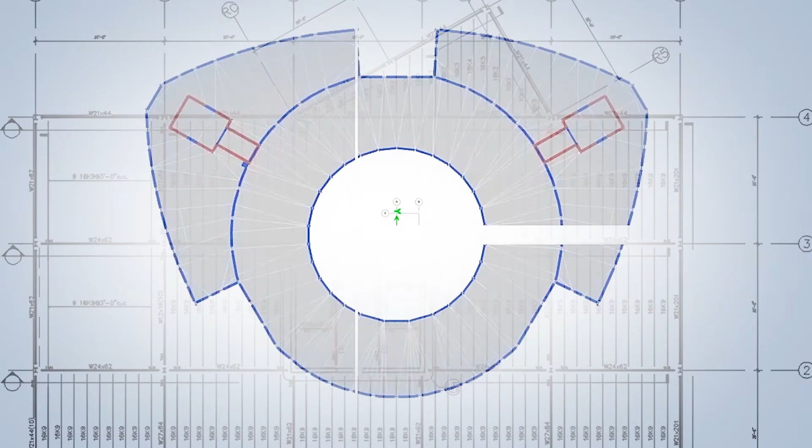I really love events like this because they highlight the incredible contributions of the structural engineering profession to humanity. Those that know me know that I have always believed that human beings are created for one fundamental reason, and that reason is to make the life of another human being better. And the beauty about the structural engineering profession is that we make life better for all of humanity on a daily basis. I mean, consider the stuff that we do. You don't have to look very far to see the incredible impact of our profession. Every metropolitan city is a testament to the grandeur of our work. And it's only because of structural engineers that our economic infrastructure even exists.

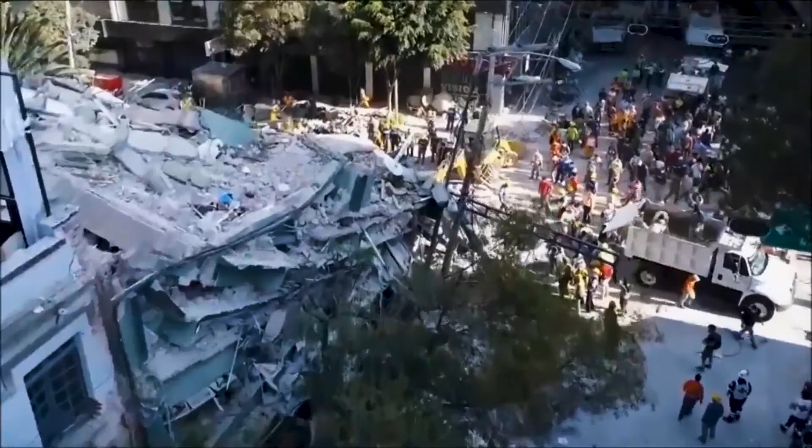On the other hand, our retrofit work preserves our past. It preserves our heritage. It preserves our history for all of the future generations to come. Every monument that's a testimony to the grandeur of humanity is standing only because at some point a structural engineer was involved. And above all, we are in the business of saving lives. We protect humanity from the ravages of natural hazards. Structural engineers are the reason why buildings don't fall down in earthquakes and buildings don't topple over in windstorms. They say that a person becomes a hero by just saving one life. I contend that structural engineers are saving lives every time the wind blows. That is the grandeur of our profession.

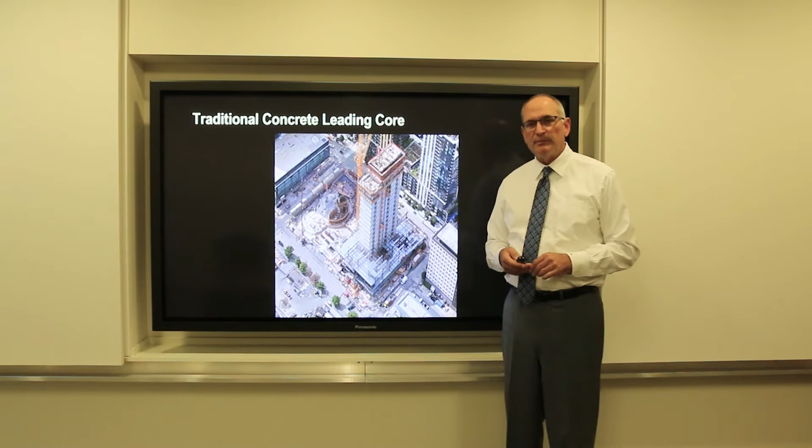The owner of the building asked us to see if we could come up with a better idea, an idea that would save time and save money, and still use the principles of performance-based seismic design. In the case of this building, Rainier Square, we did such a thing, and I'm going to share the details of that system with you now.

It's only through performance-based seismic design that we're able to achieve this design, because it falls outside of any of the code parameters that we would read in the prescriptive language of the code today. The building itself was on the cover of Engineering News Record magazine a few years back when we first designed it, because of the novel system that was used, not recognized by any building code.

There were many risks associated with that, of course. And performance-based seismic design allowed us to overcome those risks.

In Seattle, it's located in the heart of downtown on 3/4 of a city block. The project participants were notable Seattle architects and developers. And here are some of the statistics of the building. It's a very tall building, nearly 300 meters tall, with 7 basements, 1.4 million square feet of space in total.

A typical low-rise floor plate looks something like this, where the red color indicates the core wall of the building. Not dissimilar from what you'd see with a reinforced concrete building, but in this case, we used a composite system, one combining steel and concrete in a new and novel way.

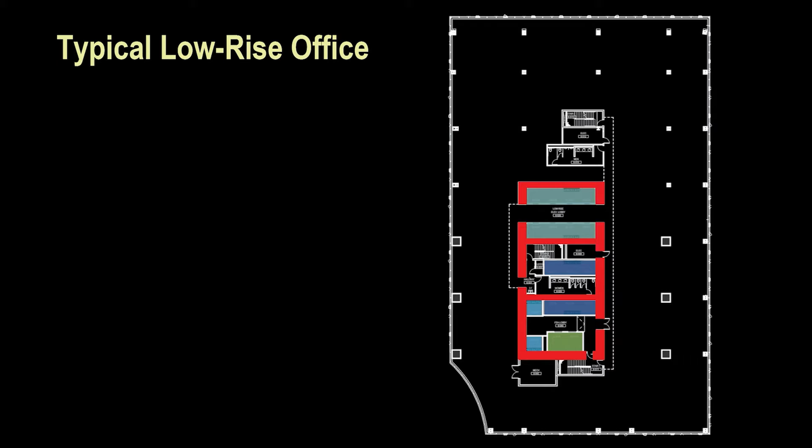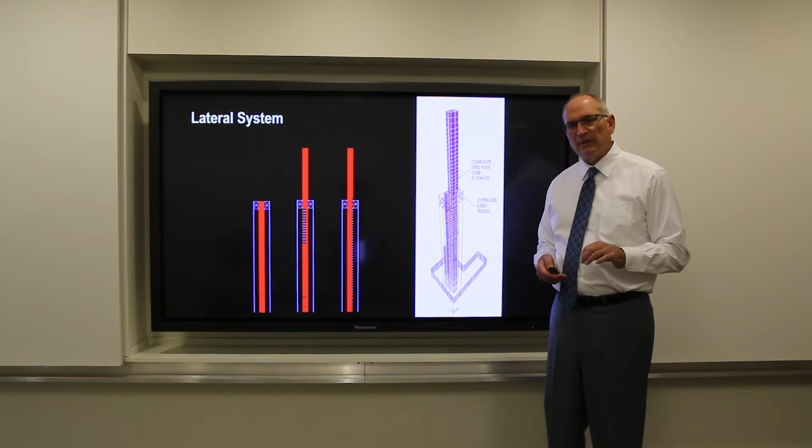In order to brace the building for wind and seismic loads, we needed to supplement the core with some additional bracing, in this case an outrigger system located at the mid-height mechanical floors, with outriggers and belt trusses reaching out to outrigger columns. Again, all of this is fairly indicative and similar to buildings that have been built the last 20 years. What's novel about this building is how we actually made the parts and pieces.

A close-up of that outrigger floor with the outrigger trusses and belt trusses shows that, in a traditional sense, we might connect steel trusses back to a reinforced concrete core. That connection becomes very challenging, very time-consuming, and very costly. So we tried to imagine a whole new system.

That whole new system was entitled a concrete-filled composite plate shear wall, or a panelized system, in which prefabricated steel panels could be made in a shop, trucked to the site, and then erected to form the building much like Lego blocks form a Lego tower.

Some of the dimensions of those panels ranged in thickness from 45 inches, which is about 1.4 meters, to 21 inches, which is just under half a meter.

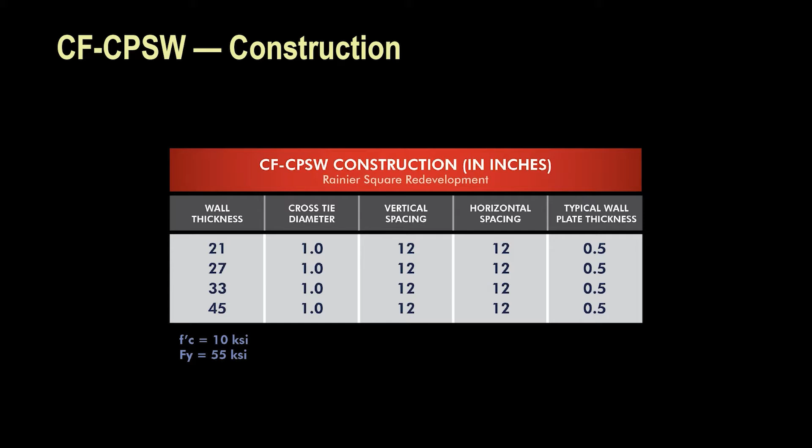The splice connections were also made in this fashion, where one plate stacked on top of another plate, and in this case were welded together in the field to form that field splice.

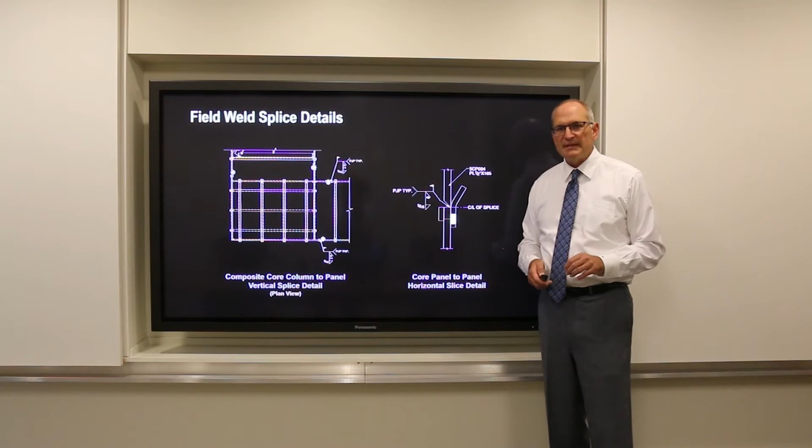None of this system has been described in the building code until just now, so as we were designing this building, we needed to use performance-based seismic design principles in order to justify the geometry and the design.

Individual panels look something like this, where the link beams that are commonly formed in the field were actually prefabricated as part of this H-shaped panel, and those panels then trucked to the site and stacked on top of each other to form the building.

In this case, we used 8 corner columns to form guides for those panels. The corner columns were 2 stories tall, where the individual wall panels were only 1 story tall. Again, all of these pieces were fit together in the field with the prefabricated units.

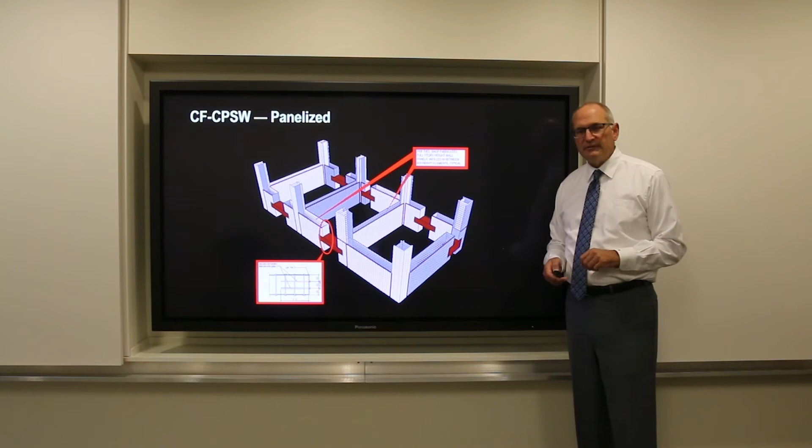Research behind all of this system was conducted starting in the mid-2000s at Purdue University, funded by the Charles Pankow Foundation and the Magnusson Klemencic Associates Foundation. Professors Bowman and Krager were the first to start researching this back around 2005, 2006.

Here you see a 5-story tall T-shaped wall section, which we built in the laboratory at half scale and then tested through the rigors of seismic loading protocol.

We looked at the panels also in an unconcreted position to understand their buckling capabilities and strength in the erected position prior to any concreting.

More recently, Professor Varma at Purdue has carried on with the research, looking at a variety of panel configurations wherein the cross-tie geometry and/or studs inside the wall panels help provide additional stability.

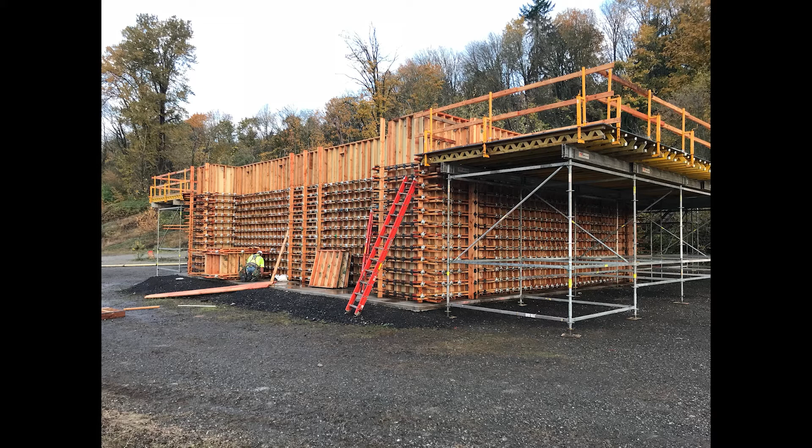We built full-scale mock-ups to ensure that this building would be able to be built correctly and efficiently once we got underway on site.

A full-scale concrete mock-up was first conducted to test the flowability and placeability of the concrete mix design. The mock-up was made of wood formwork and plastic cross ties so that we could take it apart after the concrete was placed, to see how the concrete flowed and was consolidated, ensuring our mix design would perform as intended.

We also built a steel mock-up to ensure that the pieces could be fit together, manipulated off the truck, lifted into place, and then secured.

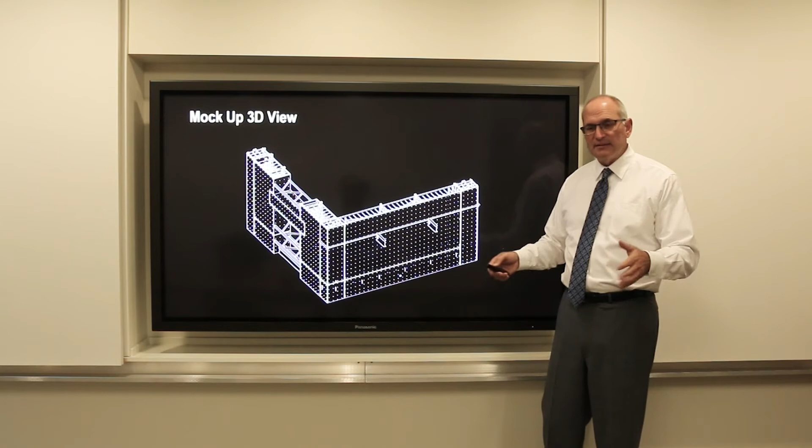The field welds were also made as part of the mock-up to understand the best welding procedures to be used to secure the two panels together.

Ultimately, shop drawings were prepared. Typical panels such as this, a planar panel, or more complex panels that included the link beams, as I mentioned, including, if you look closely, shear tabs to receive incoming beams, and the ledger angle to support the metal deck, were all fabricated in the shop.

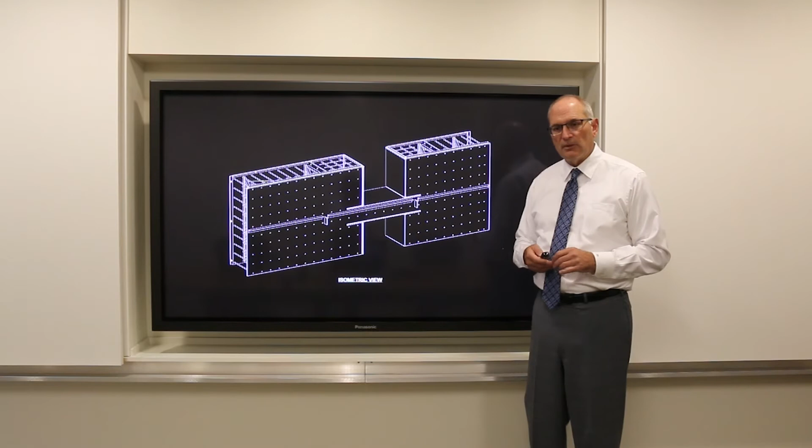Mechanical penetrations for ductwork and piping were also prefabricated in these panels to allow for a very efficient field erection process. Ultimately, the panels arrived on site and were trucked to a very close location and lifted down, in this case, into the excavation, where they were secured at the foundation level.

In this case, the initial ring of panels was erected on steel columns, which we entitled stanchions, that were embedded full thickness through the mat foundation, which was 12 feet thick, or about 3.5 meters thick.

Panels began to show up on site immediately thereafter, and the building was constructed very rapidly, as you can see in some of these photos.

From the beginning of construction to the end of construction, we erected 65 levels of steel in only 10 months. This is an amazing feat in order to erect a building of such scale in such a short amount of time.

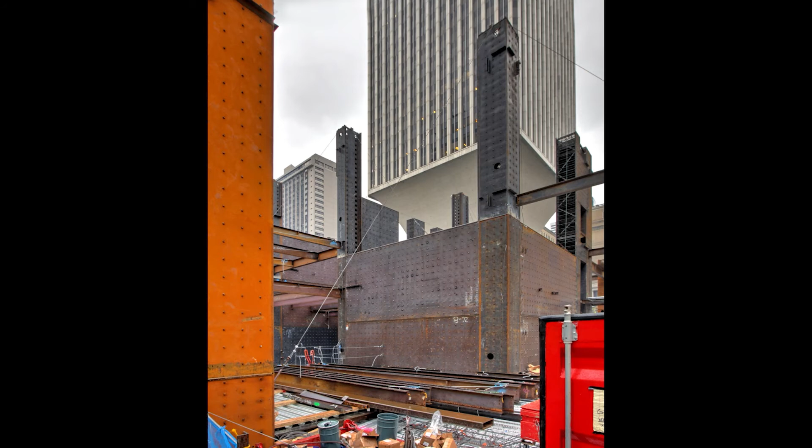Here you see those 2-story tall corner columns that formed as guides, with the 1-story tall panels interplaced between them. Looking closely, you can see round holes in those corner columns, and that's the location where the concrete was inserted and placed through a pump.

As the core wall rose up higher and higher in the building, you can see some images of how the parts and pieces came together. This image actually is interesting in that it's looking directly out of my personal office window. My office is on the 32nd floor of the building next door to this construction site, so I was able to watch the construction of the entire building firsthand.

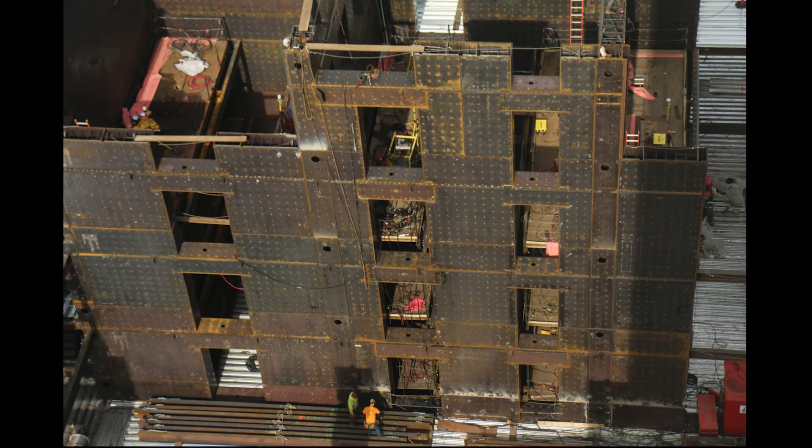A close-up of some of the wall panels coming together, and that connection between the outrigger trusses and the core wall was all shop fabricated, saving a bunch of time in the field. Originally, it was thought that these connections built in the field would take an additional 2 months. That 2 months of time was eliminated from the schedule through shop fabrication.

The outriggers themselves were a combination of steel shapes. You can see here, and in the gray color, a buckling restrained brace. And that buckling restrained brace acted as a seismic fuse for the overall system. Once again, only through performance-based seismic design were we able to demonstrate the performance of this system and that it would achieve the objectives that we set out in terms of overall performance.

The topping out ceremony occurred exactly 10 months to the day from the first day we set steel. An amazing feat, if you can think of that, 10 months to erect 65 floors of a building.

The building's now completed. In fact, just recently the hoist came down, the exterior wall is completely installed, and people, residents and office workers are starting to move into the building. So again, only through performance-based seismic design were we able to achieve this type of new, novel, never been done before system, through using the basic principles of engineering, math, and science.

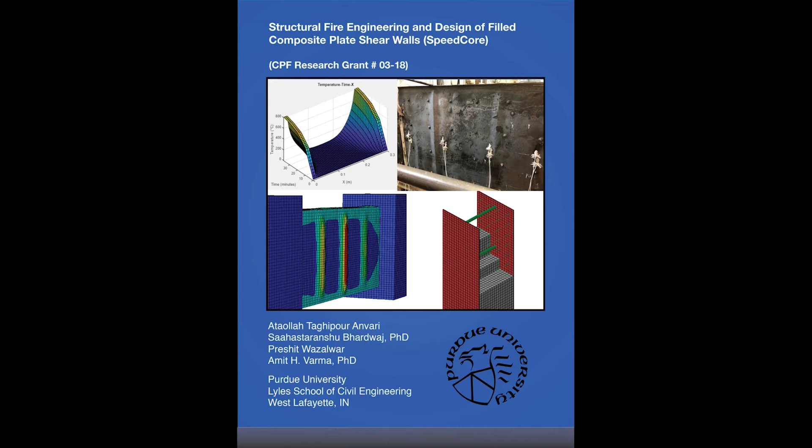After the outcome of the design of that building, we've continued research on this and have delved into the world of performance-based fire design, testing these wall panels for their fire performance to understand whether or not they need to be spray fireproofed. The research has been completed at this point, and the outcome is that they do not need to be spray fireproofed so long as certain design parameters are met.

Subsequently, a number of new buildings are being built using the same system, given its promise of efficiency, resiliency, and speed, all being done using performance-based design technologies and methodologies, both for the structural engineering and for the fire engineering.

This building is in San Jose, California. It's about 20 stories tall, and in the red color, you see the core wall layout here. Once again, very similar layout as if it were a reinforced concrete building, but in this case using the composite plate shear wall sandwich system.

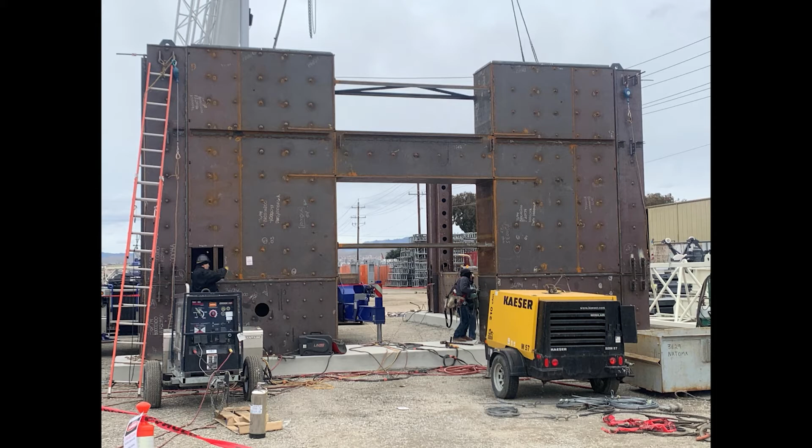The mock-up that we built for that building was completed not long ago, and that building is called 200 Park in San Jose, California. Here you see one of my colleagues, Russell Larson, standing adjacent to the foundation connections for those panels, again, sitting on these stanchions that anchor the wall panels into the foundation itself.

Currently, we're designing this tall building in Boston, our first attempt in a wind climate outside of a seismic zone to use this same performance-based approach, in this case, performance-based wind engineering, in order to justify a system which has very similar parameters, but in this case, using a bolted field splice.

In many locations throughout the world, welding is not viewed as particularly field-friendly, and instead, bolting would be a much more preferred approach. So we're investigating and designing bolted splices for the field, again using performance-based seismic design and performance-based wind design methodologies supported by research at various universities. Here you see some of the details of the proposed bolted splices.

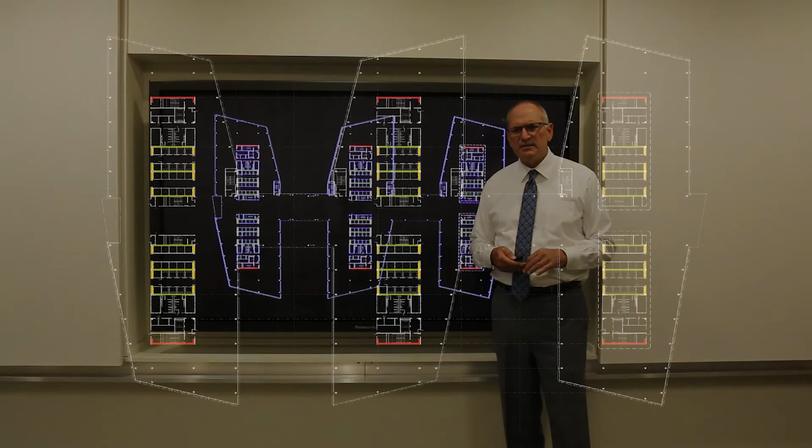Rounding things out, we're currently designing other buildings as well. This is a 3 million square foot development, once again in San Jose, California, that uses a combination of the composite plate shear wall panels as well as buckling restraint braces.

So you can see novel arrangements and unique, not prescriptive systems that are being used in a variety of buildings throughout the US and in fact throughout the world. And lastly, a few buildings in Oakland, California, where once again, traditional core wall looking buildings using performance-based design methodologies to realize systems that include core walls and in these cases, perimeter brace frames.

I hope I shared with you today a few insights into other systems that can be realized using performance-based seismic design methodologies and extend that to fire engineering and wind engineering, which are areas that are new and expanding as we speak today. Again, thank you for inviting me to participate in the conference.

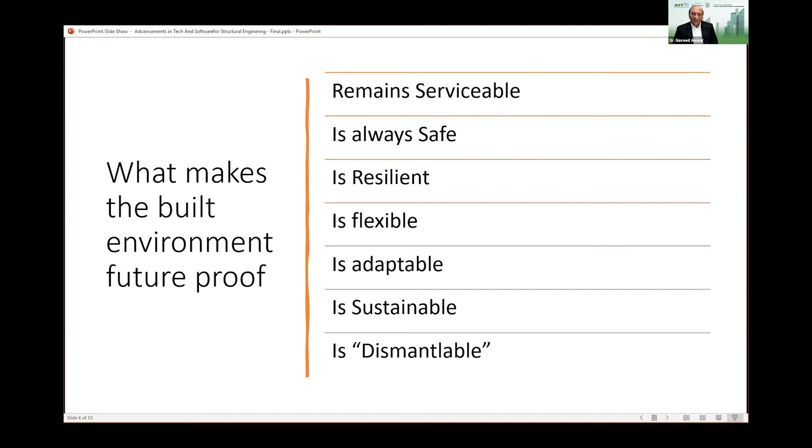Now, for structural engineers to be able to do that, we have to continue developments in structural engineering, like the one we just saw, lab testing over 15 or 20 years. It took a lot of time to develop a new system, and that will continue, and similar things apply to methods and processes. That is the development in the structural engineering field itself.

Then there are other developments going on which are outside structural or civil engineering. We have to make sure that we bring them in and integrate those emerging technologies with our structural design process, taking the best advantage from everything happening around us. We cannot only focus on our own field. We have to see what other people are doing and how we can bring it in. And we need to develop tools and software that use these technologies to the best and put them into practice, making them practically applicable.

So we need basic development in our own field. We need to make sure other technologies are brought in, and then we need to put this whole thing into software and tools that we can use and apply effectively. That's typically what structural engineers are doing and are to be doing.

Let me just briefly give an overview of where the structural design approach is going. A long time ago, people used to start with intuitive design. There were no design codes, no computers, no calculations. People just had a good intuitive sense, and those master builders designed many things. Then after that, the building codes came in and they codified many things, telling us what to do, what not to do, and how to do it. So there's a whole discussion on code-based design.

Quantum computing, as you know, is going to change the way the entire computing is done, from a 0-1 base to something in between. So quantum computing is a completely different way. It can solve problems that have never been solvable, theoretically not solvable by classical computers. So that's what we are looking at, and we should be ready to embrace quantum computing when it becomes more accessible.

Blockchain - we have heard a lot about that, and this is especially something that people think about in terms of reliability, a trust thing. For future proofing, I think the reliability of things, and to be able to trust something and document something which is completely verifiable, is something that blockchains can really help us do. How can we bring more blockchain into our process, into the development of the infrastructure? Already many applications are there in many fields, and even in our field, people are looking at how we can use blockchain to tag things and then monitor or track those tags or events.

Drones, as you know, are everywhere. They're there for delivery, for imaging, and they are now becoming easier to use, cheaper to use, and so on. So we should see how drones can help us, and I'm going to show a few examples.

Construction automation is another area where robotics are now getting more into construction. Bricklaying used to be a typical way that humans would be very good at since the beginning of civilization, and now robots can do that, if not better, just as well, or maybe faster. So this robotics and automation in construction is something we should embrace and make part of our process.

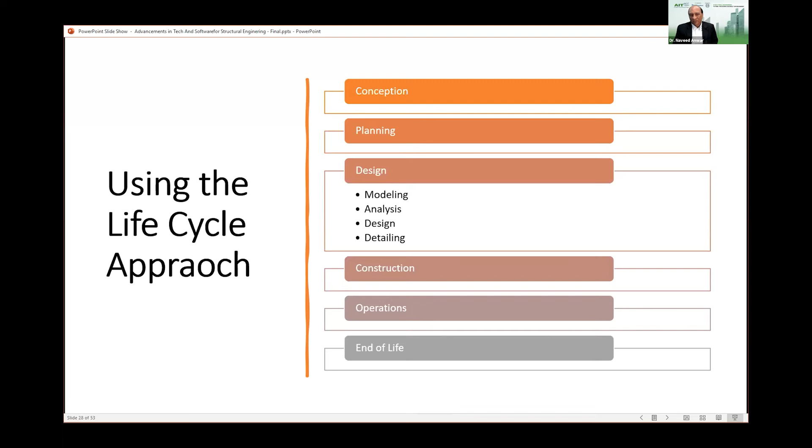The life cycle approach, of course, is always the right way to start. We should see where we can apply these technologies from the conception, planning, design, modeling, analysis, design, detailing, construction, operation, and end of life. So if we look at the technologies in each one of them, then we will be able to see what technology is most suitable for what aspect. And I just try to make some rough matrix of how these things will mesh together.

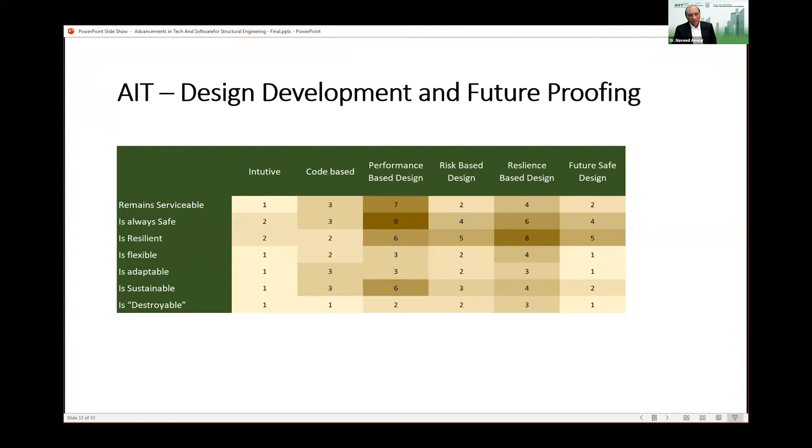Something about AIT and the same metrics. I would like to show what AIT is doing in this respect. So, AIT design, development, and future-proofing. The dark areas are where our research is focused on. You can see performance-based design is one area we're doing a lot of work there. We're also doing work on resilience-based design, risk-based design, and others. That's some of the work the structural engineering group especially is doing at this point.

AIT technology and design process, as you can see here, we are working on the application of virtual reality, AI, drones, and IoT in various areas. So this is some of what will be talked about today in our afternoon sessions.

Technology and future-proofing. And again, the work that we are doing, as you can see, AI is some, IoT is some, and then some area in blockchain and some data analytics. So this is some of the areas where there's research ongoing and planned for the future. This is an area where our students and researchers are looking at how we can bring in the technology to make the structures and infrastructure future-proof. So I'll just present a few of the theses from our students very briefly, just the topics.

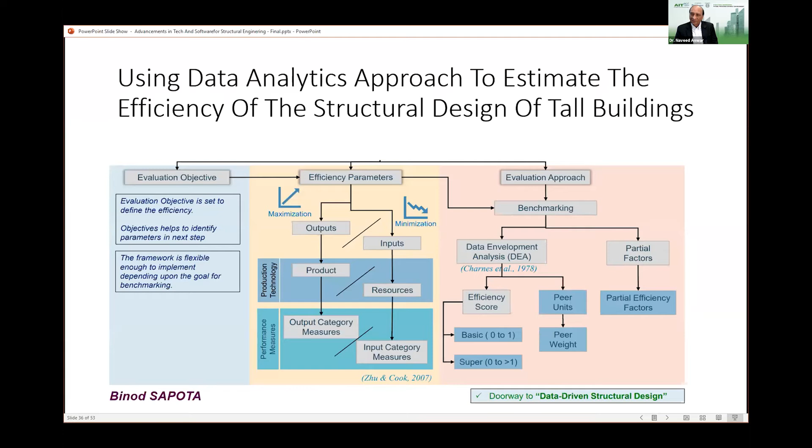For example, using a data analytics approach to estimate the efficiency of structural design of tall buildings, and we can develop a rating system. So there's a new framework developed recently by one of the students here.

Then calibration of structural models using measured building response. That's related to how we can calibrate building response and the models that we make with the actual buildings that are instrumented, so we can bring that back and make our models much more reliable.

Image-based inspection and monitoring of tall buildings. For example, you can use drones and other imaging techniques to detect cracks and to monitor them. So that is another area that the students have worked on.

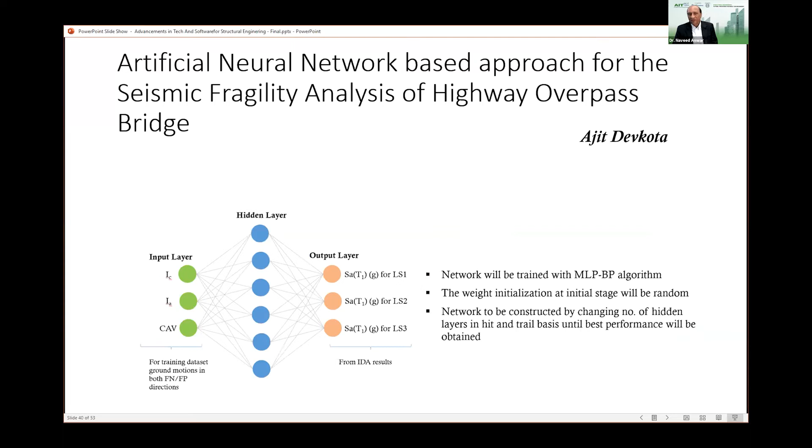This is an artificial neural network-based approach for the seismic fragility analysis of highway overpass bridges—how can we use artificial neural networks, for example, generating the fragility and reliability of the bridges, and so on.

There's a lot of talk, in fact, on fitness and personal health at this point. Many of us wear these devices, watches, or smartwatches, or fitness devices that monitor everything we do all the time—for example, they monitor heartbeat and heart rate and so many things. Using a few sensors, they can tell us what's happening with our body, and it can help us plan our health and make it better for the future.

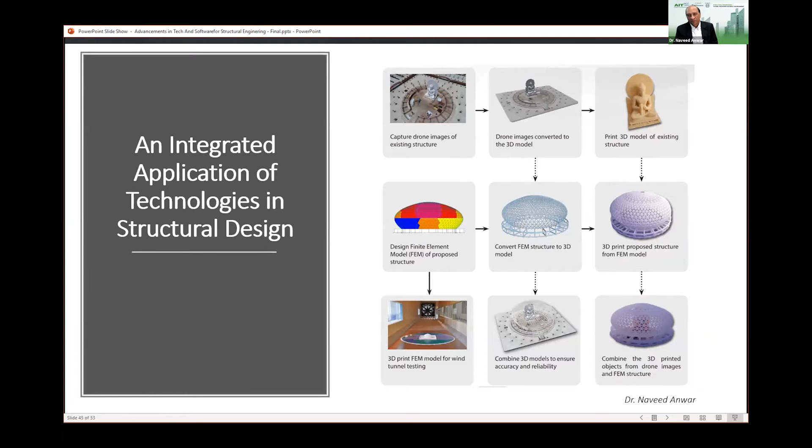That brings me to the development of building information modeling and bridge information modeling, which takes the design to multiple dimensions, not only length, width, and height, but also time, construction schedule, and what happens over time, plus cost, plus sustainability, plus management after construction. These several dimensions of BIM are possible because all of the data is integrated at the same time.

So design can be done and we can take it to different levels, and it can lead to integrated digital delivery systems beyond just analysis. That means we integrate everything from the beginning to the end. Like I mentioned, the whole life cycle can be integrated into this digital delivery system. Singapore is doing a lot of work on that, and we're also helping with parts of it, working with the Singapore authorities.

Software, as I mentioned, is also being developed a lot. I just mentioned a few from CSI because we are part of the team developing that. CSI has also been supporting many of the events, as we heard, and AIT and CSI have collaborated for over 20 years. So I just mentioned a few software that they are developing, and all of that is directed towards many of the technologies I already mentioned.

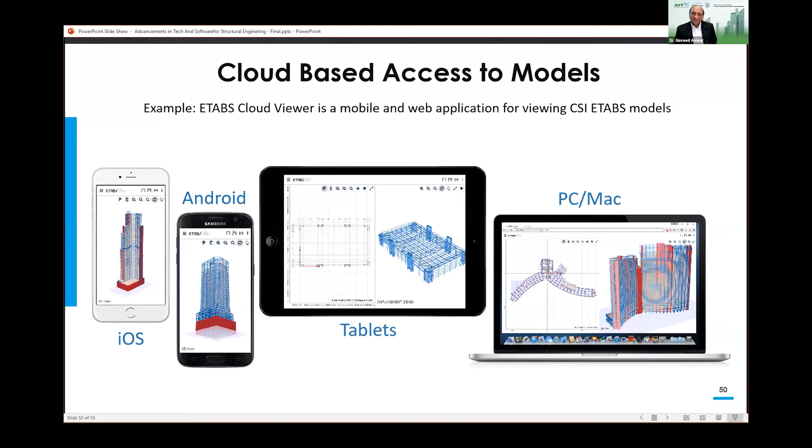Having said all of that, we can see that technologies like robotics and AI are absolutely encroaching upon many things that we do, whether we like it or not. So the best thing is to embrace them in the right way. As I've shown you, there are so many opportunities to use technology, and we can use them for good. Of course, technology can always be used for negative aspects too, but I'm sure as engineers we always think about the positive aspects.

As Ashraf said in the beginning, we want to make people's lives better. So in that way, we have to embrace the technologies in our field. But some people might say, will technology take my job? Will I lose my job if everything is done by AI, robotics, and computers?

So this is just a light note to end my talk. There's a website called 'Will AI Take My Job Away' or 'Will Robotics Take My Job Away.' If you go to that website and enter your job as accountant or auditor, it will say there's a 95% chance that your job will be automated by AI and computers in the future. If you say you're a computer programmer, it says there's a 48% chance that automated computing and automated software development will take over your job.

And that's really happening. Software engineers are so good that they're writing software that writes software, putting themselves out of a job. But if you enter civil engineering, there's only a 2% chance at this time that your job will be completely taken over by computers and robots. How true that is, I'm not so sure, but it's just an indication that at this point we are still safe.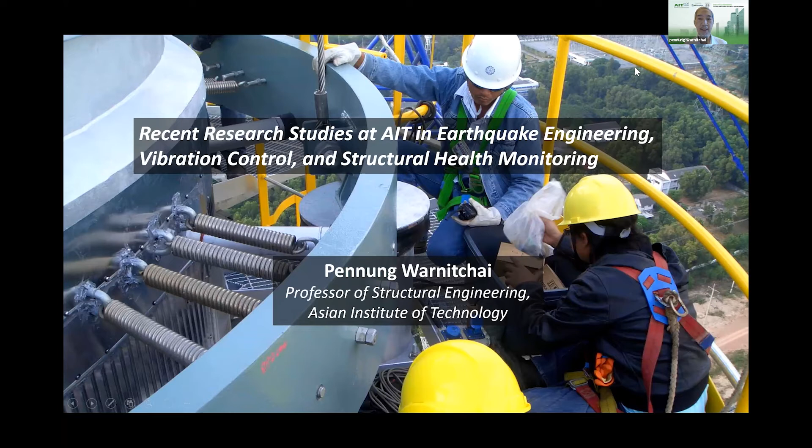This is an example structure that needs vibration control. It's a very tall, slender steel structure, a steel stack. This structure is located in Rayong, about 200 kilometers from Bangkok, the capital city of Thailand. The structure is quite tall, about 80 meters. Because it's made from steel, it's quite flexible, and this type of structure is very vulnerable to dynamic wind effects. The wind load can produce a shaking force that can shake the structure. It will create a large displacement as well as bending stress, and it may lead to fatigue failure of the structure at the base.

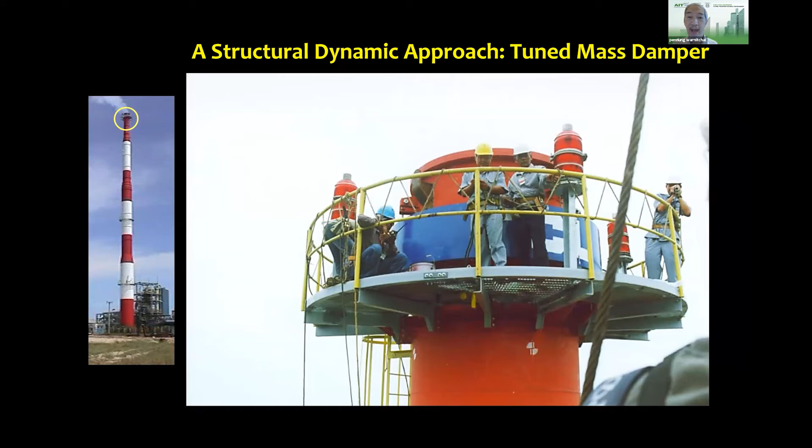There's another approach which I want to highlight. I call this the structural dynamics approach. You can see here, actually no stiffening truss, no helical strake, but we put a kind of blue colored ring on the top of the stack. It becomes like a ring pendulum. From a distance you cannot see that, but if you zoom up, you can see this blue steel ring hanging from the stack. That's how it looks, the steel ring.

You can see here, the weight is about 3 tons, and is hung from the stack by these suspended wire ropes. We have 3 ropes hanging this pendulum so it can swing in any direction. The bottom of the ring is connected to the stack by a viscous damper.

We actually purchased this unit from Germany, and we put them together to form a pendulum system. We call this a tuned mass damper. It's a kind of vibration absorber.

When the stack vibrates or sways, it makes this pendulum move. Energy is transferred into this pendulum motion, and energy in the pendulum is absorbed by the viscous damper. This is a way to increase the energy dissipation of the entire structural system.

But in order to make the system effective, we need to make this tuned mass damper's pendulum frequency match the natural frequency of the stack. That's why we call this a tuned mass damper. This is the tuned mass damper I designed myself and installed about 20 years ago.

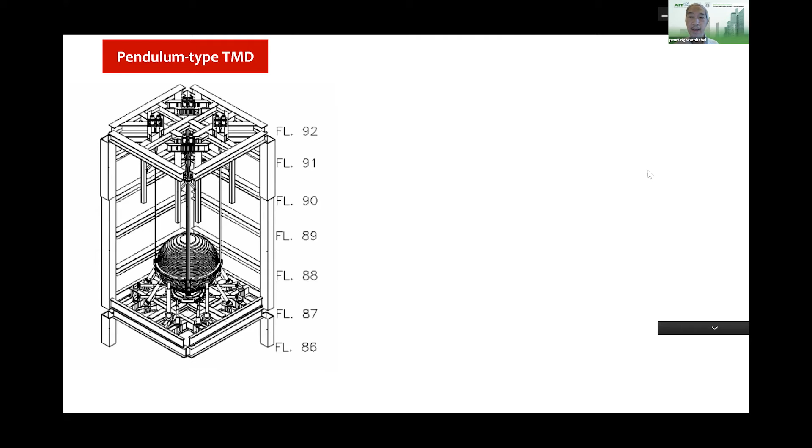At AIT, we are thinking of a different idea - a different configuration of tuned mass damper that looks like this. We call this a tuned mass damper made from multi-stage steel laminated rubber bearing. It's a very simple construction.

You have a mass put on a rubber bearing, and this rubber bearing is actually a steel laminated rubber bearing. You can find this bearing in some bridge structures. It's quite a thick rubber bearing, and we put it in many stages. We found that this type of configuration makes it possible to design a very large mass.

We can make it have a very long natural period, and it can deform with a large displacement. It occupies only a small space. The construction is quite simple - you just put it on the floor, no need to hang it from any structure. It has low maintenance requirements because this rubber bearing is quite durable, and the cost is low. Rubber bearings are also quite available in the market.

Now, if you come back to Taipei 101 tower again and look at this kind of large pendulum structure, if we redesign the tuned mass damper, it can be reduced to something like this - much smaller, much more compact. You can actually use the space on the top floor for other purposes. This is very expensive space. And if you do it this way, you can save the cost, reduce the cost of the damper, and make it more economical and practical.

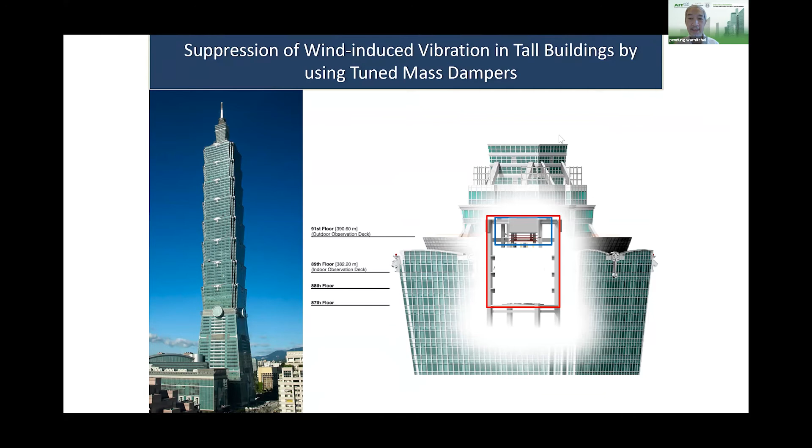We can apply this same type of system in many other buildings. This is work done by one master's student at AIT, Mr. Pruk Jansukho, just a few years ago.

We actually constructed a prototype, scaled-down model of this tuned mass damper. The mass is just 2 tons, 2,000 kilograms, put on a small multi-stage rubber bearing.

And we actually used a small shake table to simulate the top floor motion of the building. You can see here the movement. So we actually put the vibration sensor on the shake table.

So we are thinking of a 200-meter tall building installing this tuned mass damper. This is the result. We put a tuned mass damper of 1,000 tons on the top of this 200-meter tall building. Before we put the damper, this is a time history of horizontal acceleration of the top floor.

The gray color shows a very high level of floor acceleration, up to the level that can create many problems for building occupants. But after we install the tuned mass damper, it's reduced to the black color. So we can reduce the acceleration level significantly by installing this compact multi-stage rubber bearing tuned mass damper.

Here is another view from the top. The horizontal axis shows the X direction acceleration, the vertical axis shows the Y axis top acceleration. The gray color is the acceleration level without the tuned mass damper, and the green is the one with the tuned mass damper. So you can see that we can significantly suppress the vibration response of the tall building if we have such a tuned mass damper.

Well, I'm hoping that some of you will be convinced and we can actually install this type of damper in a real building soon in the future.

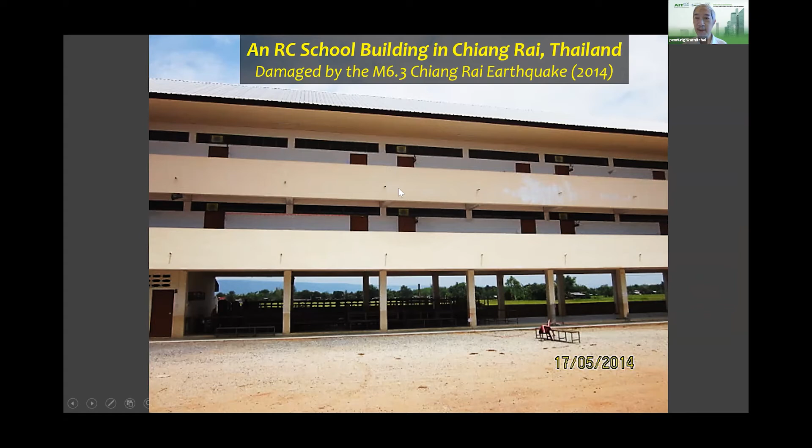It caused damage to this building. This building is a very typical school building in Thailand, and it has one obvious typical feature we call soft story. The first floor is softer than the upper floor, because the upper floor has many brick walls and parapet walls, while the first floor is open, just columns.

So the first floor is much softer than the upper floor. This is not a good feature. We call this an irregular feature, and it leads to the concentration of earthquake response damage on the first floor. The damage will concentrate on the columns in the first floor.

Okay, this is the investigation of the buildings after the earthquake. We saw the cracking, the yielding, the damage to the columns. If the shaking had been stronger, this building would have collapsed, but it's still standing in this case. We want to prevent this type of damage in the future.

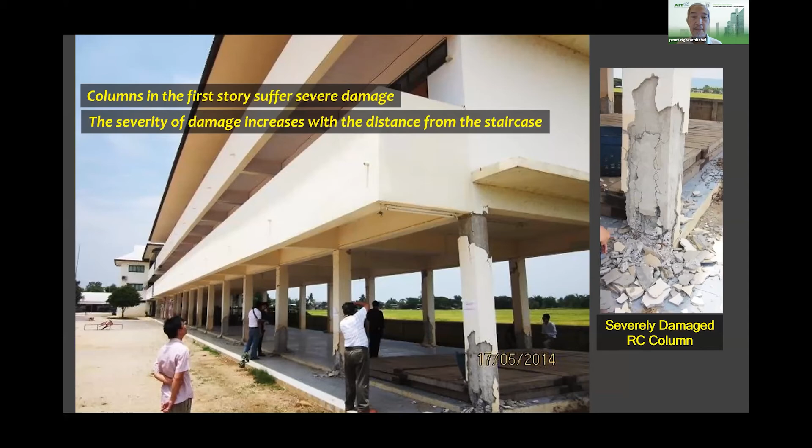So this led to another project: seismic retrofit of a soft story RC building in northern Thailand using a buckling restraint brace. You can see the black color brace here and here.

It's a collaboration between AIT, Nanyang Technological University in Singapore with Dr. Li Bing, and I work with Dr. Sutat from King Mongkut's University of Technology Thonburi. We worked together and actually retrofitted 4 buildings in northern Thailand. Now I'm working with National Taiwan University to retrofit 2 or 3 more in Thailand.

So this is actually a picture of a buckling restraint brace. I think you've seen the picture of a buckling restraint brace in an earlier presentation by Dr. Ron Kremenczyk. A buckling restraint brace is a brace that can yield and plastically deform in both tension and compression. It will not buckle, it's buckling restrained, so it can absorb vibration energy effectively both in tension and compression.

I mean, the building can sway in any direction and it will absorb energy through its hysteretic behavior.

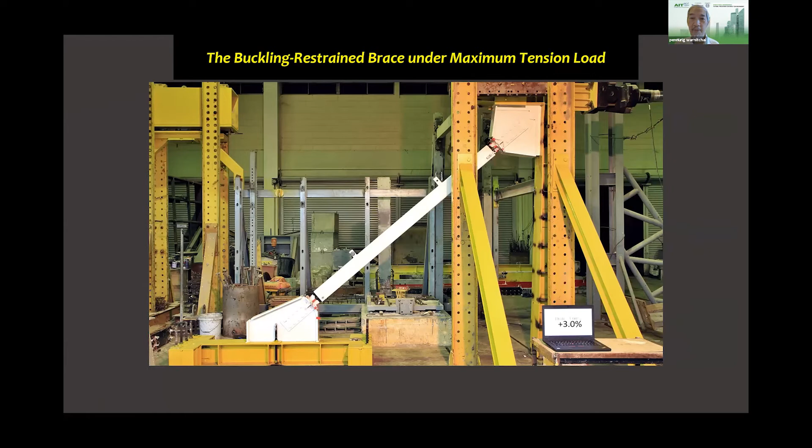Well, this buckling restrained brace is homemade, made at our lab here. This is our structural engineering lab at AIT. We create the full-scale model of this brace, put it under the loading frame, apply the actuator, pull, push, apply the kind of cyclic load up to the level of yielding to create significant plastic deformation. And the brace actually worked well.

You don't need to put so many braces into the structure. For example, in this building, you just put only 4 braces in one direction and 4 in another direction.

And the cost is not that high. The cost of retrofit using buckling restrained brace is about 15% of the building cost. It means that if you have the budget to build a new building, you can use this budget to retrofit about 5 to 6 existing buildings.

So it will be a better use of the money. You can retrofit 5 to 6 or 7 buildings using the same budget to build a new building.

This technique is quite commonly known and used in some countries, like in Japan, but it's still new for Thailand. This is probably one of the first buildings in Thailand, and it's new for many countries in Asia.

I actually think we should try more, especially those in Philippines, Indonesia, or Nepal. These are earthquake countries. From India, north of India as well. You are in a seismic hazard area, so I think applying this technology will improve the safety of your building. We should promote more seismic retrofit of weak concrete structures.

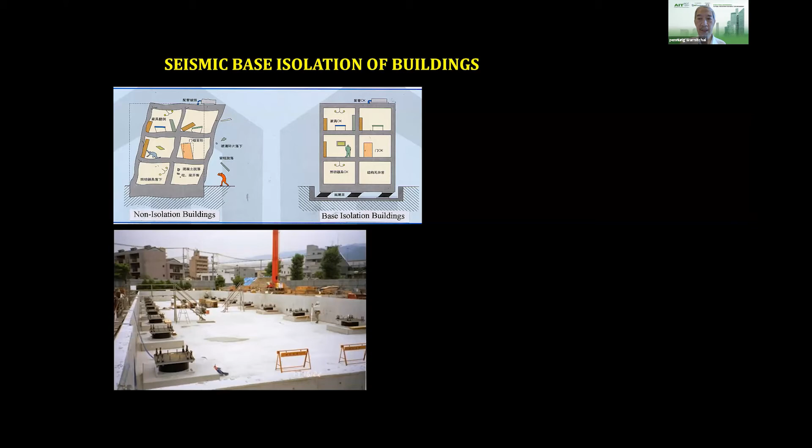This is how it looks. This is the base of the building. We put the rubber bearing before, and we construct the entire building on top of the bearing. The bearing, as I showed you earlier, is a rubber bearing with steel laminate. This is a kind of standard bearing for base isolation. There are many types, and they are commercially available.

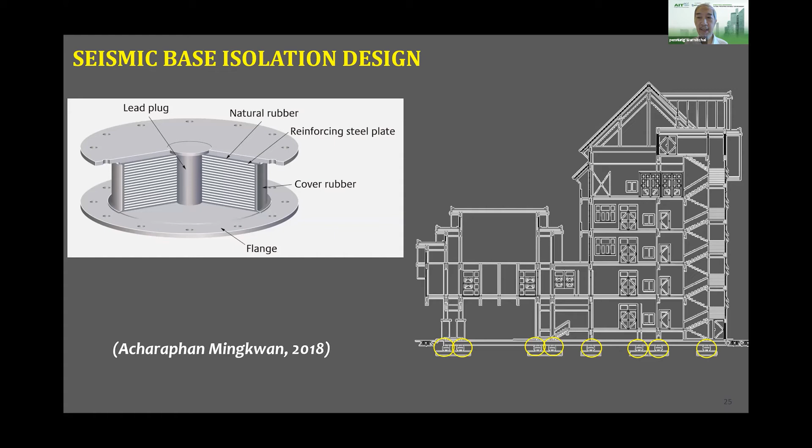She had to look at commercially available bearings, and she selected 4 different types, which we call group 1, 2, 3, 4, placed underneath many columns, almost all of them.

So the bearing is very soft laterally, but very stiff vertically. The stiffness in the vertical direction is similar to the stiffness of the column of one floor, approximately the same order of magnitude.

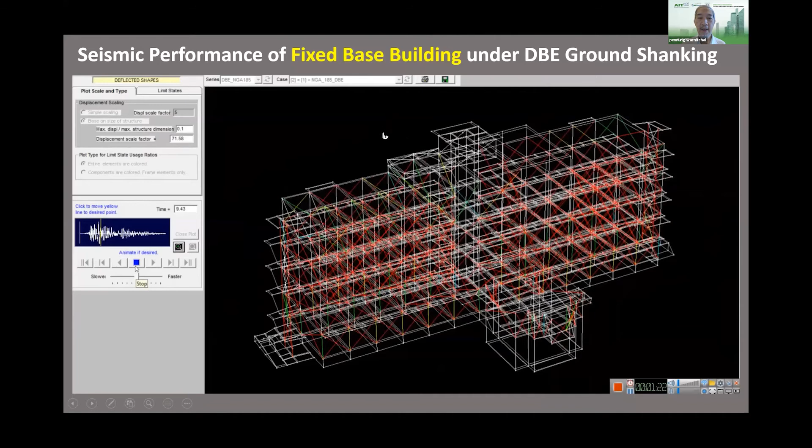You have to design the building to allow this kind of movement, relative movement between the foundation and the superstructure.

So the movement concentrates at the base isolation, and the structure still deforms and has some damage, but the level and extent of damage is much less compared to the fixed base case. So I think you can see the potential. This simple technology can be applied.

If we design well, it can prevent and suppress many problems. The idea of base isolation can be applied to tall buildings as well, and in Japan this is quite popular.

I visited the Tokyo Institute of Technology, the lab of Professor Kazuhiko Kasai, and he showed us a tall building on his campus that uses base isolation. Normally we'd think base isolation applies only to low-rise or mid-rise buildings, but in Japan they seriously apply it to tall buildings. Many tall buildings have base isolators placed underneath them. Professor Kasai brought us down to see the base isolation underneath the building. You can see the large rubber bearings.

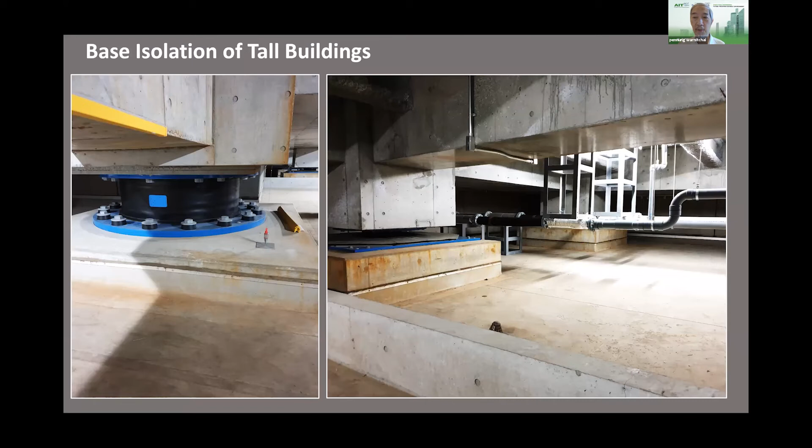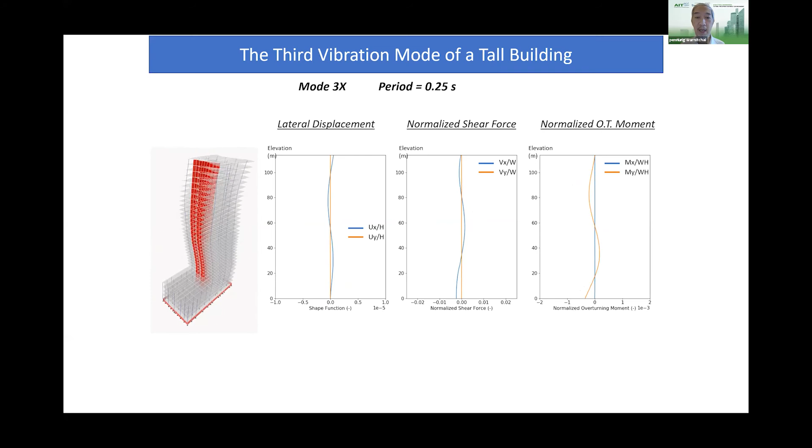This is work on base isolation of tall buildings. We are trying to study this because buildings in many countries in Asia are quite different from buildings in Japan. In Japan, they apply a moment frame system, but in many other countries here, we have shear wall, shear core, plus frame.

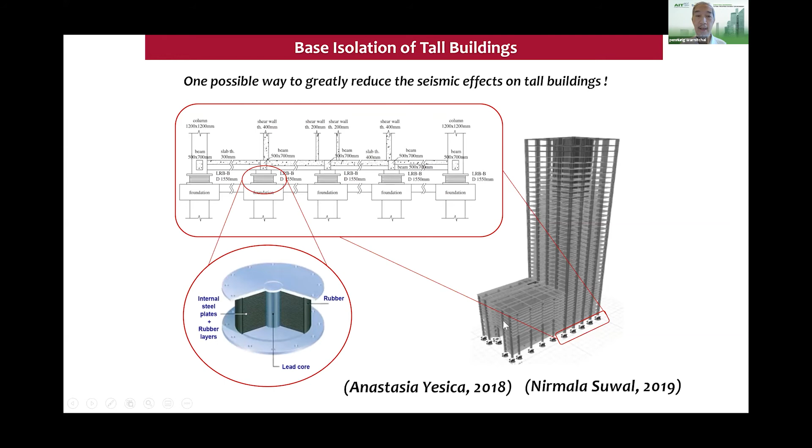So Anastasia and Nirmala, two students working in different years - one coming from Indonesia, the other from Nepal - both from earthquake-active countries, are interested in this topic and worked on it. They are master students, so we studied what would happen if we put a tall building under a base isolation system.

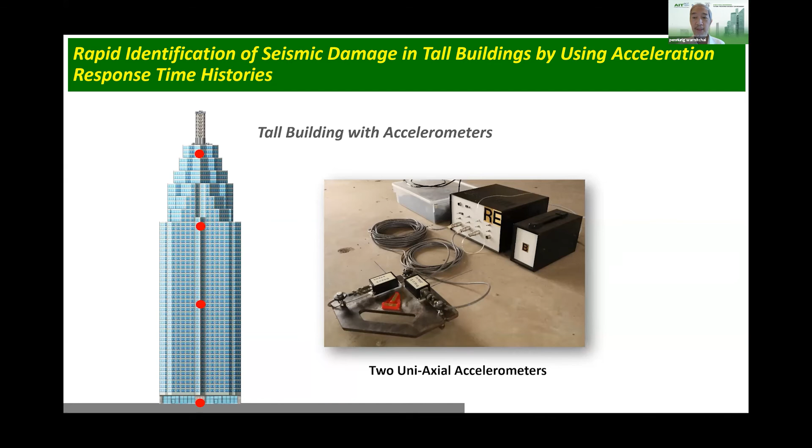The traditional approach using acceleration sensors is to use this acceleration data to calculate natural frequency, mode shape, and damping ratio of many vibration modes. When the structure is in initial intact condition, it will have a certain value of natural frequency, damping, and mode shape. But after the seismic event, there will be some change in natural frequency, some increase in the damping, or some change in the mode shape. This can be used to identify the structural damage.

This is a traditional approach, but we think that this approach is not effective because the change in natural frequency and mode shape are, in general, so small that it's hard to identify the damage. So in our approach, we are not doing this way. We actually try a different approach.

At AIT, from the acceleration sensor, we try to first extract modal acceleration in each mode. By integrating them twice, double integration, we can get the modal coordinate of each and every important mode. All responses are proportional to modal coordinate, so we can estimate all responses, either story drift, floor acceleration, bending moment in the wall, or shear force in the building. We can compute this response mode by mode, and sum them up to get the total response.

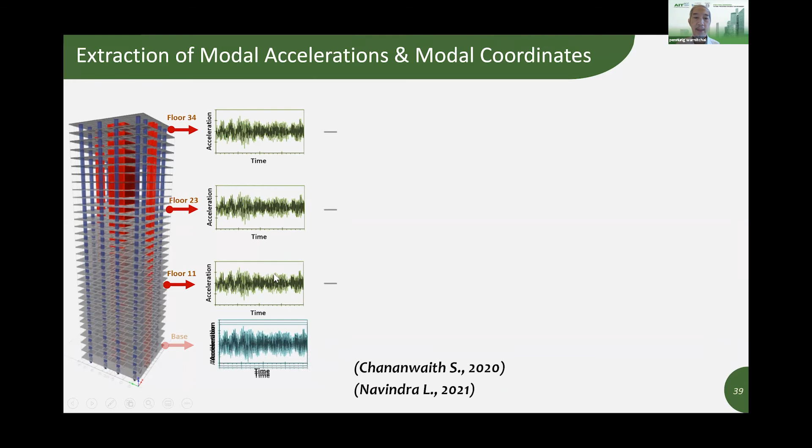We actually put the acceleration sensor at only some floors, not the entire structure, just floor 34, 23, 11, and at the base. Based on this, we modify the measurement data a little bit, and we pass the measurement data through a so-called orthogonal filter. We can actually break or transform this response into modal acceleration, mode 1, mode 2, mode 3. So from each of these, we can compute the modal coordinate for each mode.

And from each modal coordinate, we can compute story drift and shear force produced by that mode. And then when we combine all this, we can compute any response we want.

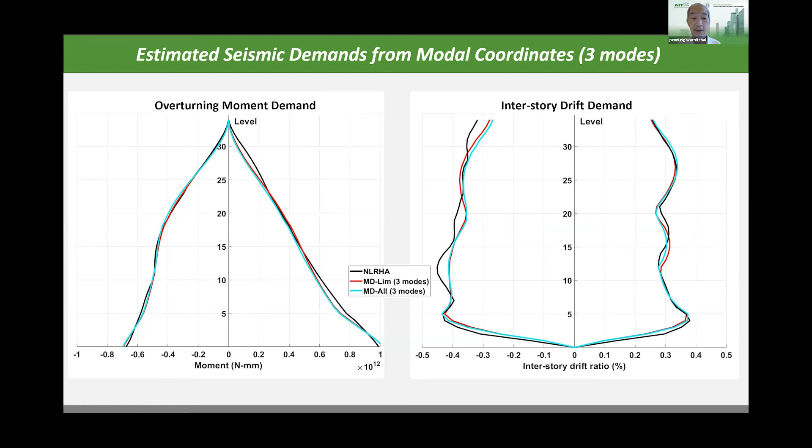So actually, this is a numerical study, not a real building. So I assigned the work of experiment to another student, Mr. Abhishek Regmi.

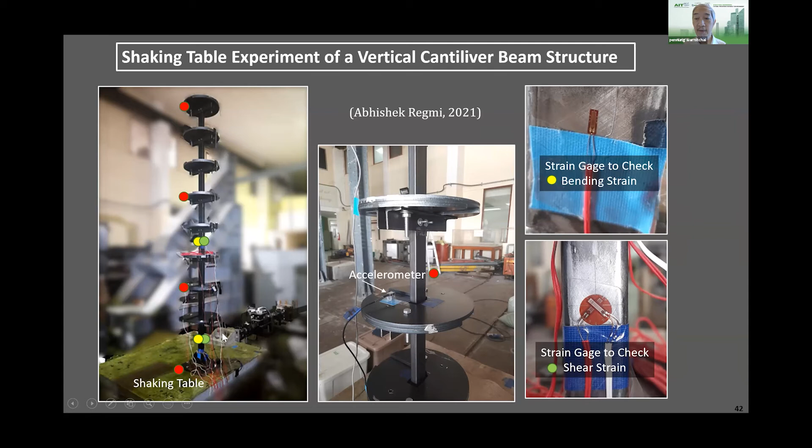Then we conducted a shaking table experiment to test the concept. We wanted to test if we measure only acceleration, can we use that to estimate the bending moment and shear? We calculate bending and shear from acceleration, but we also measure bending and shear directly just to compare the results and see whether we can predict it.

You can see this. Actually, we tried to create damage to this structure, but the structure remained elastic.

So this is probably the last slide. You can see this one is bending strain at the base, shear strain at the base, bending strain at mid-height, shear strain at mid-height, and there are two color graphs.

The red one is the direct measurement, and the black one is the estimate from acceleration data. So you can see that we can actually predict it well. Using only acceleration data, we can predict how the shear response and bending moment will vary with time. I think this goes the same for other responses.

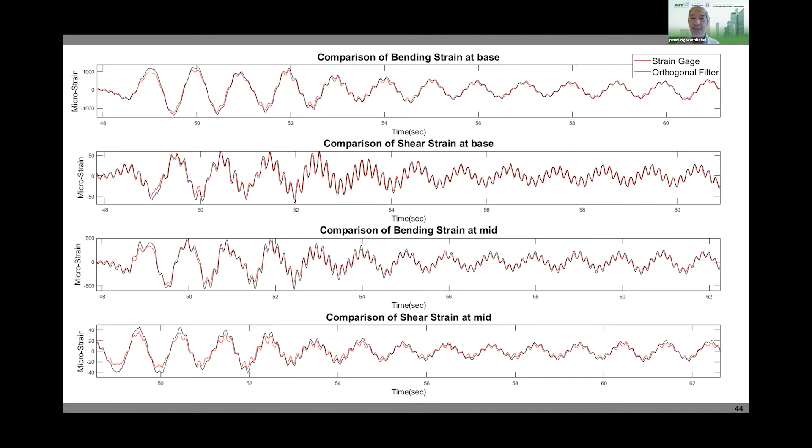So this is an example of research work that we are doing at AIT. We are trying to prepare for the future, testing many new ideas and concepts. But there are many more that I cannot explain today because of the time limit. If I had no time limit, I could cover more. So I think that's all. I hope you enjoy this presentation. Thank you for your kind attention.

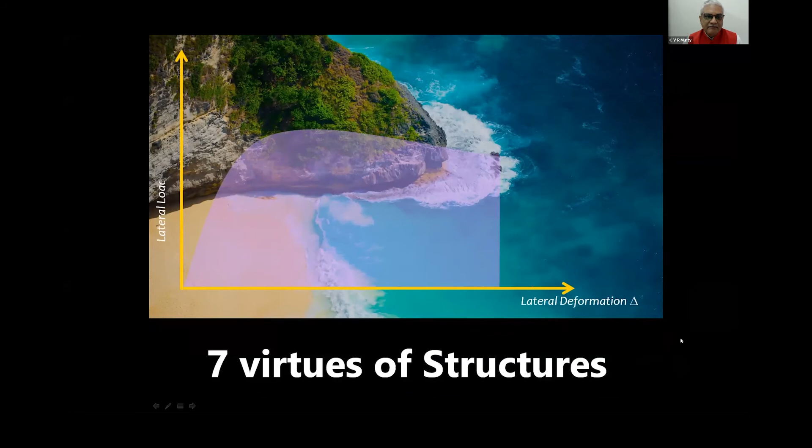Coming into the center space of structural engineering, there are 7 virtues that the built environment needs to be endowed with: a good configuration, initial lateral stiffness, at least a guaranteed amount of lateral strength, some ductility, assured deformability, a preconceived desired collapse mechanism, and ultimately the energy absorbed by the structure. All of these have to come into the structural engineer's effort to do the computations ensuring that the built environment is safe against the various loads placed on the structure.

And it is these 7 items that have actually led to the progression of the design methods. Today, we can place all the design methods on 4 steps: stiffness-based, strength-based, deformation-based, and energy-based.

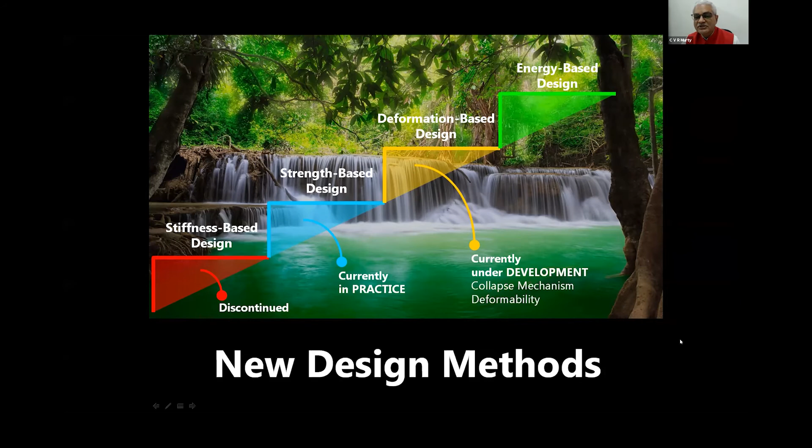Stiffness-based design has been discontinued for some time now because it has not resulted in successful designs. Currently, we are practicing strength-based design, but very shortly I suspect we will have to bring deformation-based design into the codes of practice, especially given the importance of having a predetermined collapse mechanism and assuring a certain deformability in structures. Also, in the road ahead, it is possible that we will look at the energy absorption capacity of the structure and decide whether it's going to be elastically contained through the help of isolators, or inelastically absorbed through damage induced in the structural members.

When you look at today's design practice, we know our material, we design a section, we detail a member, and go ahead and construct the structure, right? But in the current design process, we don't assess the structure, at least analytically, and do not understand what collapse mechanism we are offering to the people at large. In effect, we are doing the forward loop in the design practice and not the backward loop.

I suspect that in time ahead, when the people of the world ask us for safety as structural engineers, we are bound to do the closed loop design and not just the open loop design we offer today. To do all this, the structural engineer should have strong concepts, and these strong concepts will reflect through the hand calculations one does in trying to assure that the numbers coming out of the computer calculations are actually reasonable and well placed.

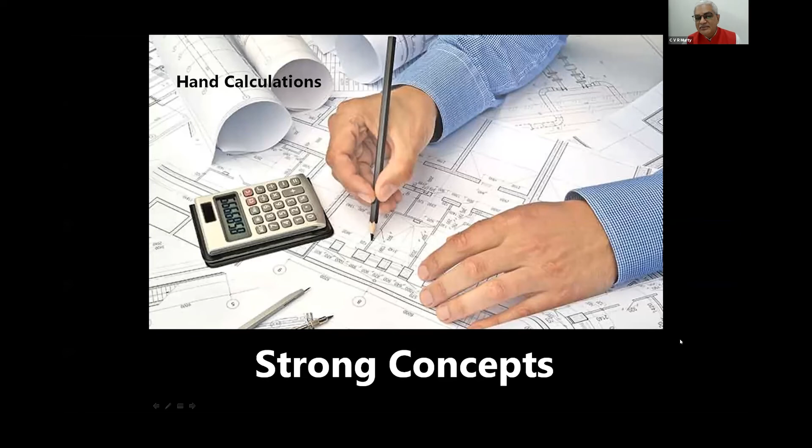The second most important characteristic the structural engineer must possess, the virtue one must possess, is physical intuition. You should be able to feel the deformed geometry of the structure and thereby understand the physics behind the mathematics, not just the mathematics of the physics that we focus on today. In the road ahead, this is going to be a determining factor on the quality of structural engineering we will do, whether we are really understanding the behavior or blindly doing the numbers.

Another crucial feature is that the structural engineer must feel how the forces are flowing through the structure and clearly understand that every time the load path bends, there is crisis. Providing structures with the least number of bends in the load path will be the focus of effort in structural engineering in the time ahead.

Another important practice the structural engineer must adopt in the time ahead is to actually sleep with the mode shapes and natural frequencies before starting any calculation on the structural design. The reason is that the missing masses, the extra stiffnesses offered in certain locations, or the excessive flexibility present in a few elements of the structure, all these have to be weeded out before actually going into the design effort.

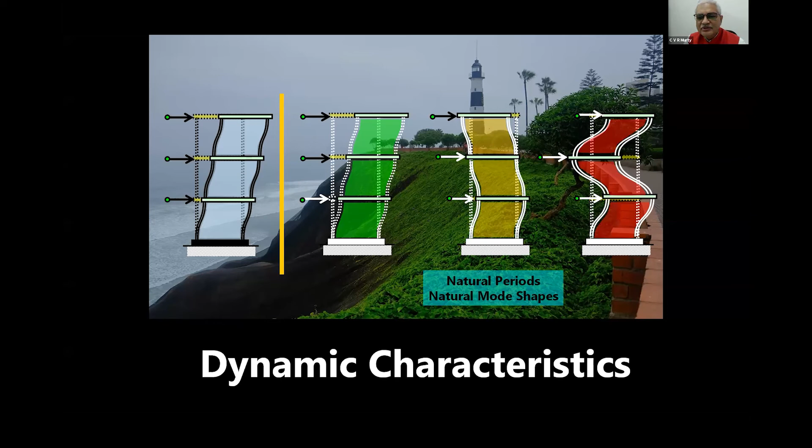That is why understanding the dynamic characteristics of the structure is the starting point for improving the quality of structural design in any type of structure, be it a building, bridge, water tank, or retaining wall. In all structures, one must know the natural mode shapes to say whether the structure has been reasonably proportioned. It's also important that most of the response is taken by the early modes rather than the higher modes. In particular, the torsional mode has to be kept away from becoming the center of the structural response.

There has been interest in quantifying damage over the years, but a clean understanding of it has not yet been achieved. The next two decades will require us to quantify damage, because when we talk about resilience, risk-based design, cost, loss, and loss of life, we need to quantify the damage in the structure. Only then will we successfully propose a design acceptable to society. So here we are looking for a novel way of quantifying damage.

Another thing essential in a structural engineer's career is not to get stuck on one item, but to actually complete the full end-to-end study of the subject one is pursuing. For example, if I take the study of dams, one must know field tests, do analytical work, and do laboratory work. Each of these has more nuances.

Let's take the analytical work alone. You will do equivalent static analysis, response spectrum method, pseudo dynamic method, and the dynamic method of analysis. Likewise, I can show pictures for field tests as well as for laboratory tests.

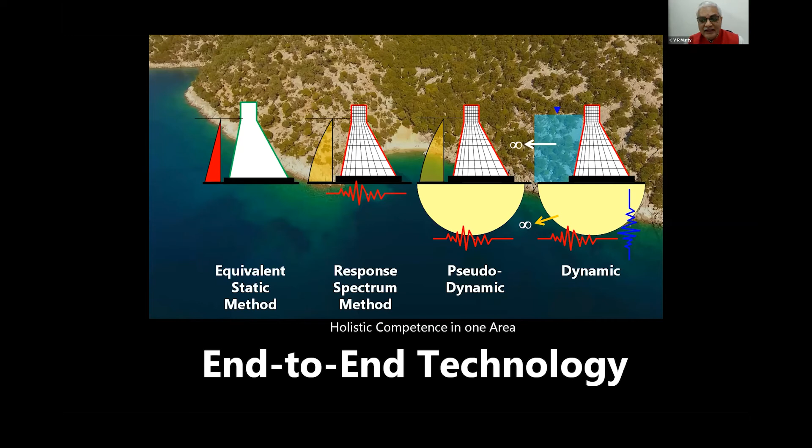This is where it is time for structural engineers to take a particular system, a particular structure, and develop holistic competence in that one area, so that the world gains by the knowledge, skill, and attitude developed by this colleague for the good of society.

One important point that has slowly been neglected is the use of tested technologies. Today the industry is running faster than R&D, and as a consequence, many untested technologies are being pushed into the market, practiced even without the availability of standards, especially in countries where there is no techno-legal regime. Excessive use of precast buildings in seismic areas without experimental backing, and pre-engineered buildings and so on, has become a menace in many of our countries.

This is where full-scale testing of structures will be essential, especially when we adopt type designs and repeat them in tens of thousands of units built across seismic regions. It is necessary for nations to build full-scale testing facilities to guarantee that the housing schemes we propose for people at large are indeed safe, and that people can live in them assured they will not collapse. So tested technologies alone should find center space in the future of structural engineering.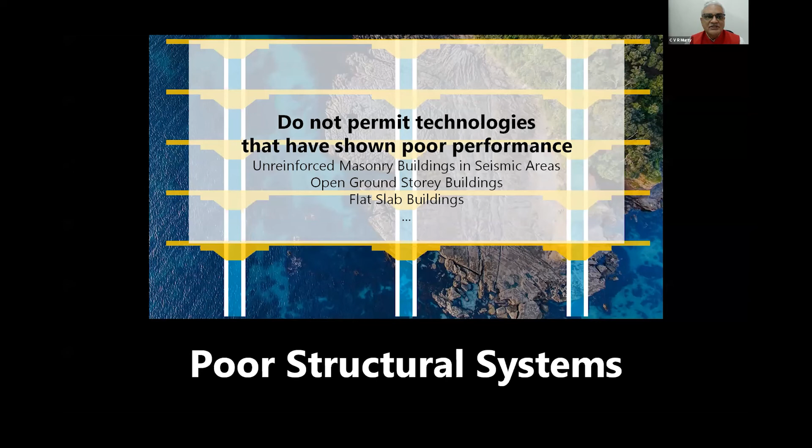At the same time, I would like to say that poor structural systems should be weeded out. We should not permit technologies that have shown poor performance in the past, especially unreinforced masonry in seismic areas, open ground story buildings, and flat slab buildings. These have been practiced without even understanding the implications of their behavior in strong earthquake shaking.

What we see today is that if we are very modest, we will grow about 40% more by 2050, three decades from now. But if we are a little more excited, we will be 60% more in population. And if we are much more engaged, we will become 100% more. We are doubling ourselves in the next 30 years.

This means there's going to be huge urbanization, and unfortunately we are going to densify most urban areas. This is not something we can do easily if our structural engineers lack the necessary background and competence to build structures offering larger densities for governments. As of now, we have a large stock of buildings across the world that have been built, but we don't feel all of them are necessarily safe. So the two promises we have to make are that all new structures will definitely be made safe.

And so the standards have to be raised for that. Alongside, the second promise we have to make is all the existing structures that are unsafe, we will have to do a retrofitting of the same.

Clearly, retrofit is a very tedious, long and arduous task. We can't retrofit all structures, but we need to urgently consider giving priority to critical structures, lifeline structures, schools, office buildings, and select residential buildings also.

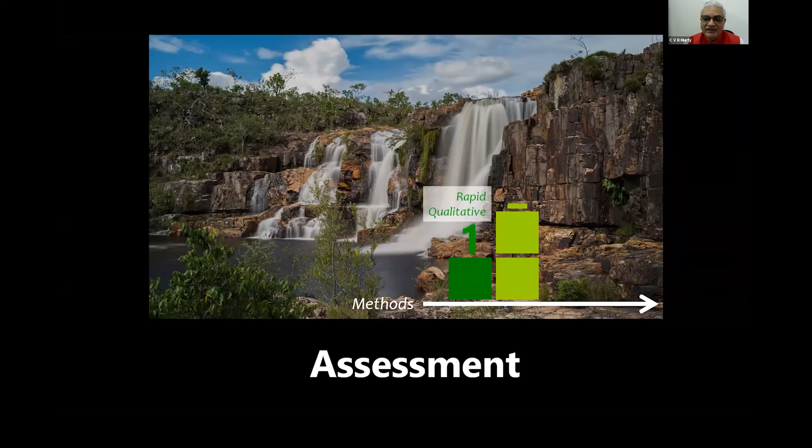Here different structures will require different solutions, and structural engineers have to start racking their brains to bring out possible retrofit solutions for the different structural forms and systems adopted across the world. To be able to retrofit, one needs a 4-level assessment method so we can shortlist structures on priority and do the retrofit.

Two levels will be for qualitative filtering, and 2 levels will be for quantitative. We need to get started with the simplified quantitative to be able to make a difference, because we don't have too much time at this point.

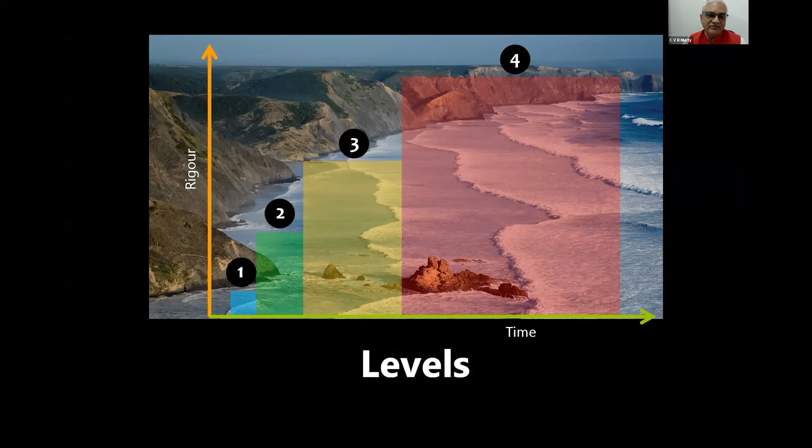When we look at the levels of effort we need to put into the assessment, either risk assessment or vulnerability assessment, we notice that as we go higher to the 4th level, it requires a lot more time and rigor, which we cannot afford. But fortunately, with a telescopic method, we can bring down the number of structures by orders of magnitude at each of these levels.

We need to quickly have in place all 4 levels of filters so that we can effectively make a difference in the retrofit, and not just blindly embark on retrofit without understanding the relative positioning of the various structures in a community.

While I'm speaking, there's a large number of vendors actually providing repair services, and they are, in some sense, coercing users to think that this repair is retrofit. I want to halt for a moment and say repair is not retrofit.

One needs to be very clear that 2 millimeters of a wrap on a column is not going to change the overall stiffness of the building. That's where the holistic approach from global to local comes in - first fixing global parameters like overall lateral stiffness, overall lateral strength, and then deformability and ductility. Those have to be contained first before one really gets into understanding what individual members can contribute. So whole to part is the strategy we need to adopt in the retrofit approach.

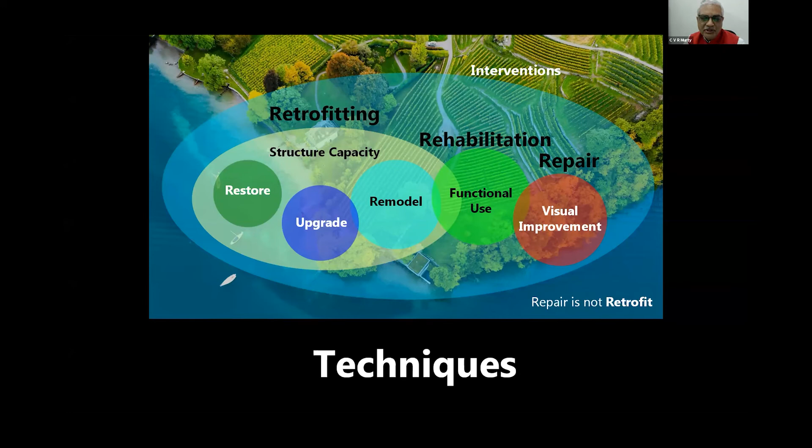If you're building a residential structure, your finishes are 60%. And if you're building a hospital structure, they can go up to 90%. So a lot more attention needs to be given to non-structural elements. Structural engineers have to understand that non-structural elements need to be secured through formal processes, to guide architects with simpler strategies they can provide as details when giving the finishings of the structure.

An important area that will grow, especially when we are talking about retrofit, is actually nonlinear analysis. Today, nonlinear analysis is not part of undergraduate education, and even in master's education, it is only in select institutes or universities worldwide that teach nonlinear analysis.

If the world has to be retrofitted, and if the current built environment has to be secured back to safety, we need more structural engineers to understand and be comfortable with nonlinear analysis, which has two parts: geometric nonlinearity and material nonlinearity. We pray that this becomes part of the mandatory curriculum in time ahead in most countries, at least at the master's level, if not at the undergraduate level.

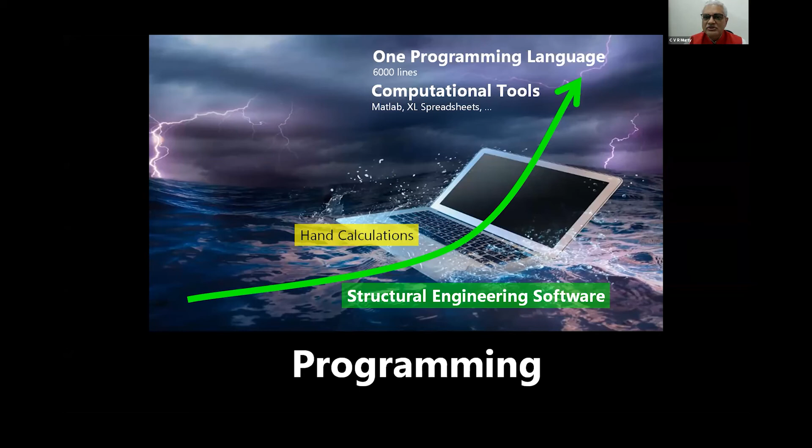Design offices will continue to need computational tools, and so MATLAB, Excel spreadsheets will also continue to be in the center space for many of the design offices.

We talked about big data this morning. The skills required for big data are actually going to be quite different from what normal structural classrooms teach you. You will need to understand probability, statistics, and also the classical mathematics of either linear algebra or even differential and integral calculus.

This is again an interface area where we as structural engineers have to work with electrical and computer science engineers to be able to create meaningful outcomes from the data that we are recording in large volumes in time ahead, from different standpoints.

BIM is going to become a central focus in most construction activities, and structural engineers do require to understand BIM to remove all conflicts before, at the field, they come back to you saying that this drawing is not acceptable. So well before we get into construction, all conflict resolution has to happen, and BIM in structural engineering is now a very formal subject - it's going to become a fundamental tool for structural engineers in the road ahead.

We talked about structural health monitoring. We also need to do load testing of some structures. We need to continue to capture ambient vibration and forced vibration responses, and especially when there is severe shaking, we will also collect inelastic responses from the structure. So this is where sensors and instrumentation come in.

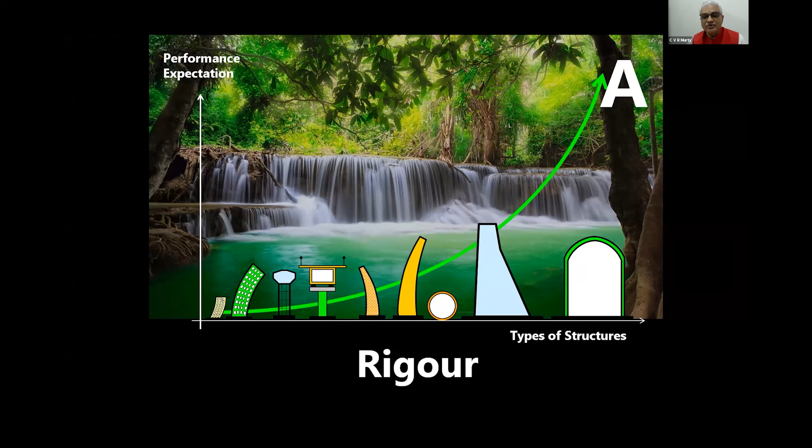I'll go to the third aspect, which is attitude. When you look at different structure types, you'll definitely require higher and higher rigor as you go to more critical and special structures, where the performance expectation is also very high. This is when one needs to accept the rigor required for different structures and be abreast with all the competence to provide a successful design or maintain an existing facility.

In structural engineering or civil engineering, when we start doing our work, we realize that we make 3 mistakes: error of intention, error of concept, and error of execution. Of all of these, error of intention is the most dangerous, and this is not acceptable in professional practice.

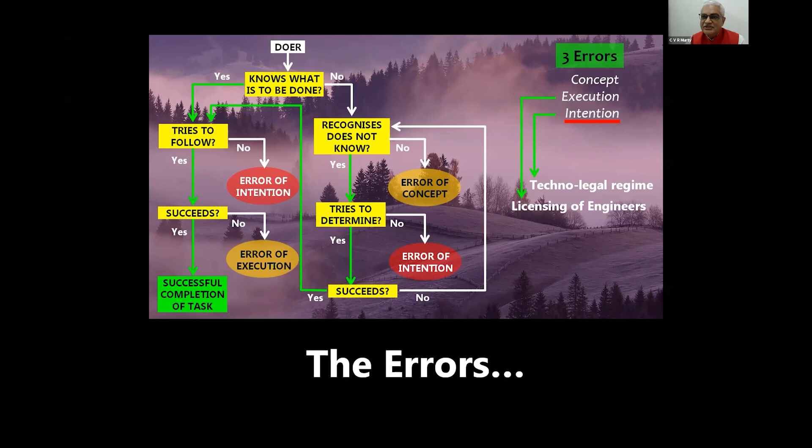We are looking at a techno-legal regime that needs to be in place in many countries which don't have one as of now. This alone can reduce the error of intention. For error of execution, we need licensing of engineers, and error of concept has to be addressed through capacity development. So one key aspect for future structural engineers is accepting that learning doesn't stop after graduation but continues throughout their lifetime.

Second, they have to accept that they must periodically write licensing examinations to maintain their status as those empowered to design structures for the world. And finally, all structural engineers have to accept with humility that they will be following a techno-legal regime, where the intent is not merely to comply with standards but to provide safe structures for the world to live in and conduct themselves.

Very clearly, in many countries we don't have structural safety audits, and we have to begin that urgently. If we really want to make this world a safer place, we need to move from a no-audit regime to a 100% audit regime. Structural safety audit is definitely one of the items that has to be on the table.

Another practice missing in many countries is quality control and quality assurance. We need to bring in a third-party independent peer review system so that the building owner has confidence that the facility being built or developed is in keeping with the best principles of safety for the people of that community.

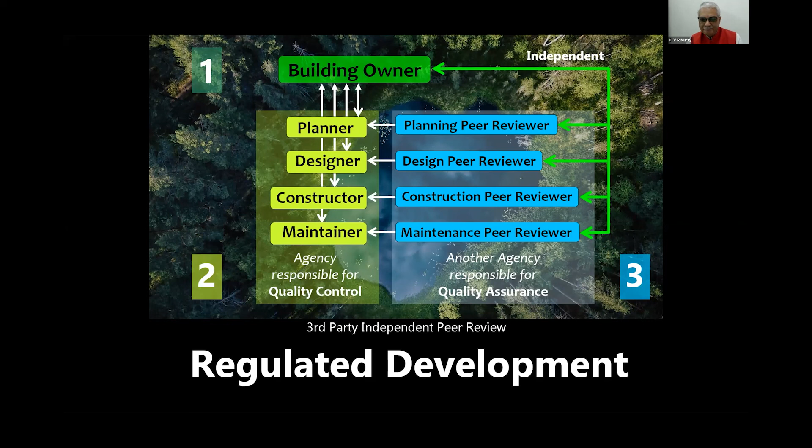Licensing of engineers will be center stage going forward, because we are looking at mobility of engineers from one country to another. This will be a key factor, since today projects are run globally and you have to design for another country's standards. Hence we need a strong base of teachers who understand other countries' standards, and a strong base of structural engineers. This can happen only through a level playing field achieved through the licensing of engineers process.

In effect, a structural engineer must have capacity not only for planning, but also detailed analysis, understanding behavior of structures, designing by different standards, understanding the nuances of construction—though not doing the construction themselves—and clarity on maintenance issues, what to keep an eye on, and eventually providing retrofit solutions. An individual should have this 360-degree education.

End-to-end competence means at an individual level one has to look at all aspects of a structure, but within that there are six features every individual must take care of. A structural engineer is not complete unless the person has put hands on all six of these aspects in their career.

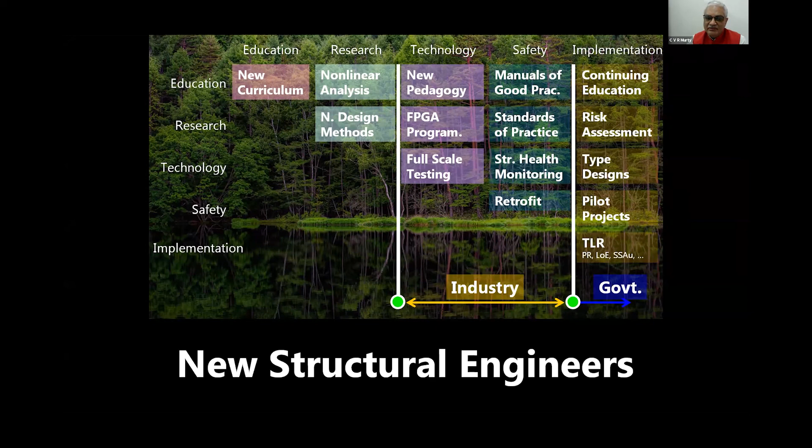On the other hand, academia has a very stiff role because they will have to feed all the mouths that are there by changing the curriculum, especially bringing nonlinear analysis and new design methods into use. If academia, industry, and government can do all these items together collectively, we will definitely make competent structural engineers in the road ahead.

I may have spent a lot of my attention either on college-going students or on employed engineers, but I must confess that follies in parenting, in childhood, and in school days cannot be corrected at higher education or in employment. So in effect, what I'm seeking is that competence development is a lifetime process.

For those who are young and middle-aged, it is time to make better parenting happen so that future structural engineers will come out with a positive attitude and will be able to build this nation or this world with better and safer facilities for all of us.

We are at a certain point of time when we begin our lives and we want to go somewhere - that's our target. Many a time I see there's an urgency or a race to take shortcuts. Well, that may not be the path. Often the shortcuts don't lead us anywhere.

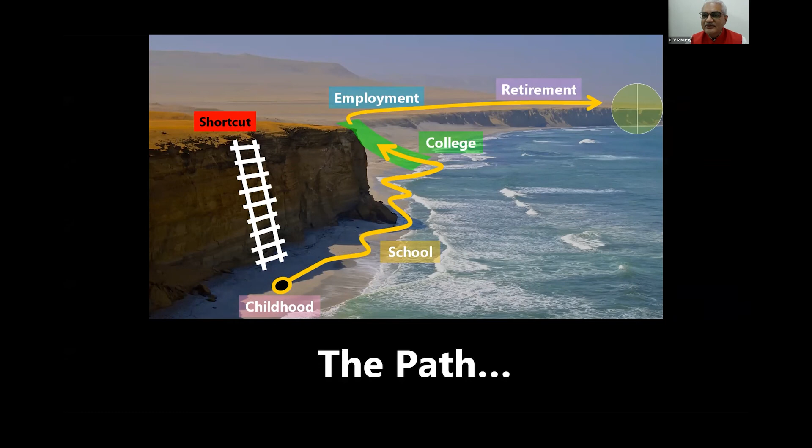I can very clearly say that a structural engineer has to keep crusading with the 5 elements of nature all the time. To do that, one needs to have a clear big picture as to what the new project is going to be, fitting in the context of the existing built environment.

What will be the geometry of this structure? Will it come in the way? Will it impose itself? Will it disturb the aesthetics of that particular environment? Or do we have enough land for undertaking this?

The structural engineer must continue to imagine new and innovative forms which are actually going to be more functional and also appealing to the eye rather than relatively straight-jacketed boxes.

On the other hand, we have to push the envelopes of our analytical capabilities and go towards forensics. We need to be able to preempt what will happen to our structure in the time ahead if a certain load form has gone past its number, and if we get realized loads which are larger than what we expect, will the structure survive?

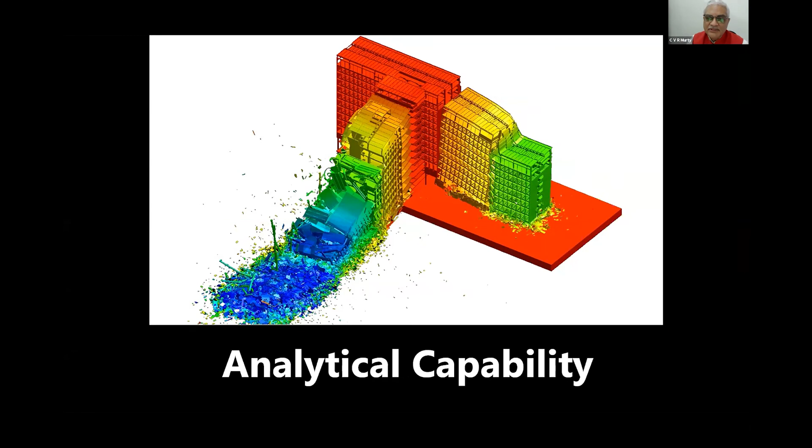If not, what will be the situation for us? Can we correct it by doing detailed nonlinear analysis at the beginning itself, without waiting for the eventuality?

Structural engineers should have the design acumen to provide that imposing structure that every owner wants to have, that special unique structure that every owner wants to own and have their name across.

Structural engineers must provide designs and solutions that can be executed, and also go and watch that execution happen, because then the next design will be that much more real through their own effort over time.

But all that said and done, 80% of structural engineering is actually common sense, and the remaining 20% is calculations. If with common sense you can get the whole framework in position, the calculations part will only be convincing and reinforcing your own conviction.

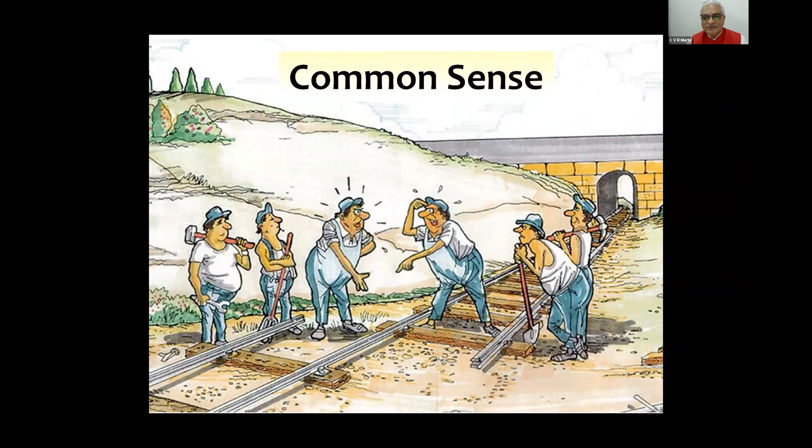This is where I think we need to make sure the new generation builds this common sense. Common sense cannot be taught - it has to be inculcated, focused through daily discussion and activity and examples of the past, and the mistakes of the past. Ultimately, I will say that safety should be in the driving seat.

Safety should be in the driving seat for all of us to be able to say clearly that as structural engineers, we have made the world safer. I'll stop here by saying structural engineering is actually art in engineering, because it's not just left brain activity. There is so much about the right brain that we have to do, which is going to take us into becoming closer to the architecture profession, closer to society, and closer to the governance people, because we are supposed to accommodate all their qualitative questions into quantitative answers. And that is where we need the right brain becoming more active. I pray that future structural engineers will be able to do that better than what current structural engineers are able to offer.

And if your dream is actually to have structural safety ensured for the built environment of the world, then it's time to get into action. Being a spectator is no fun in structural engineering. I think getting into the play arena is what the game is all about. The conditions are tough and they'll get tougher with time. But very clearly, there is a clear route we can take of persistent hard work. And I'm confident we'll be able to come out of this, because from untruth to truth, and from darkness to light, and from death to eternity has been the path that has been told to us over time.